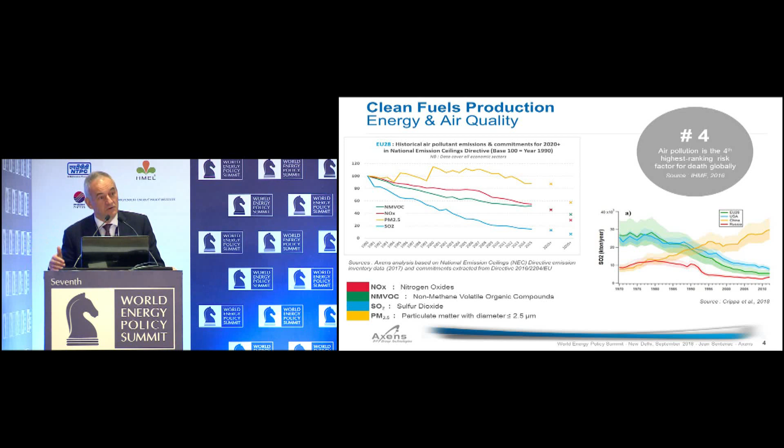Still, particulate matter, the yellow upper line, didn't progress that much. That is one of the reasons you have Dieselgate and now a kind of disaffection for the diesel engine in passenger cars, in favor of gasoline engines. But still a lot of progress has been done and remains to be done in Europe, and of course in other countries in the world.

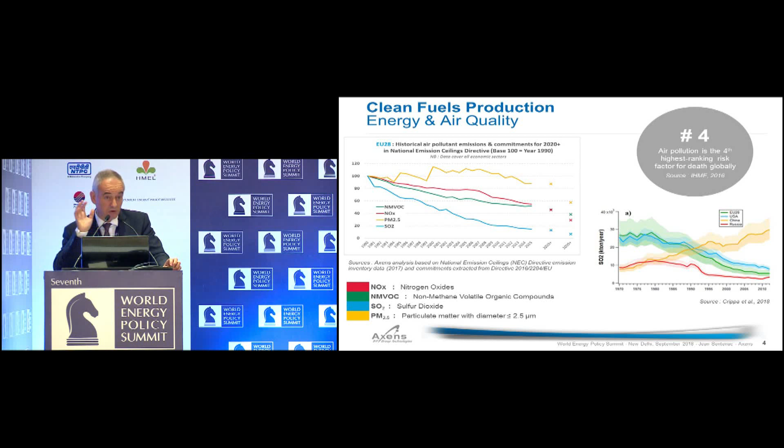Transportation is contributing to these emissions for its share: 13% of sulfur dioxide emissions coming from transport, 55% of NOx coming from transport. So there is a big challenge in addressing this issue in transportation. Our company is one of the leaders in producing what we call clean fuels, which are hydrocarbon fuels but completely desulfurized and taken out of pollutants.

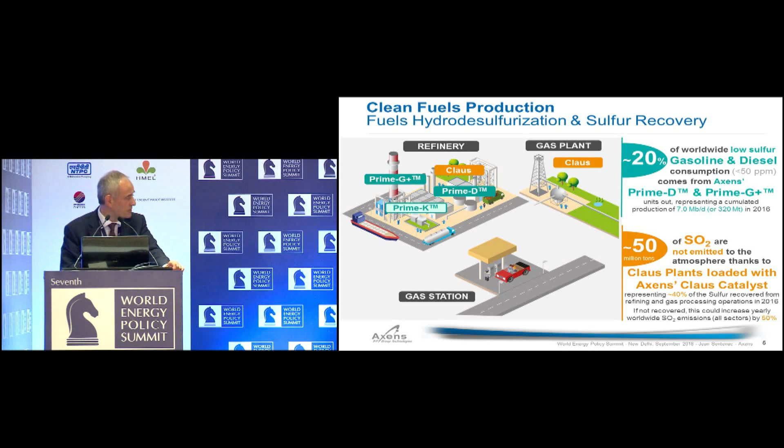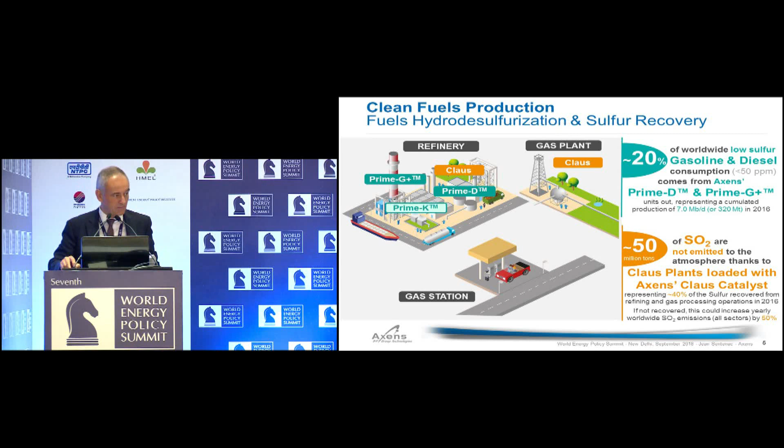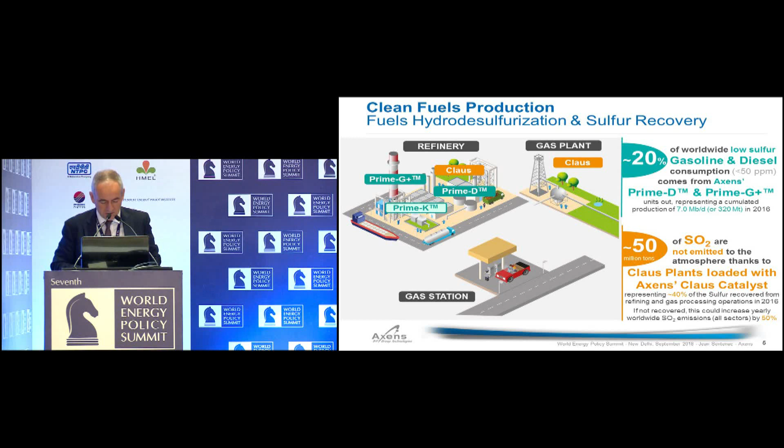Maybe I should speak in French sometime, it would be easier for me. But, precursors of pollutants, I think we say in English. Through our technologies developed with IFP, we've been desulfurizing 20% of the gasoline and diesel in the world, and 50% of the SO2 emissions generated throughout the industry use our catalyst to be transformed into solid sulfur. So we're heavily involved in the fight against pollution.

Our company is working a lot with the Indian refining industry to desulfurize gasoline and diesel. We have 14 projects underway that would start in the coming months or next year for gasoline, and 20 projects also for diesel in various Indian refineries. So we have great collaboration in this field to provide the country new types of hydrocarbons. I think I've almost finished my time, so I'll be rather quick.

On the next topic, biofuels - you see here the consumption of biofuels. We talk about second generation biofuels. It is expected to be multiplied by a factor of 25 in the next 5 years. Still, it will represent only lower than 1 million barrels per day. We consume 100 million barrels per day overall, so it's 1%. This means we still need fossil fuel, but still these fuels are a good way to decrease carbon emissions. It's also a good way to give jobs to farmers in the country.

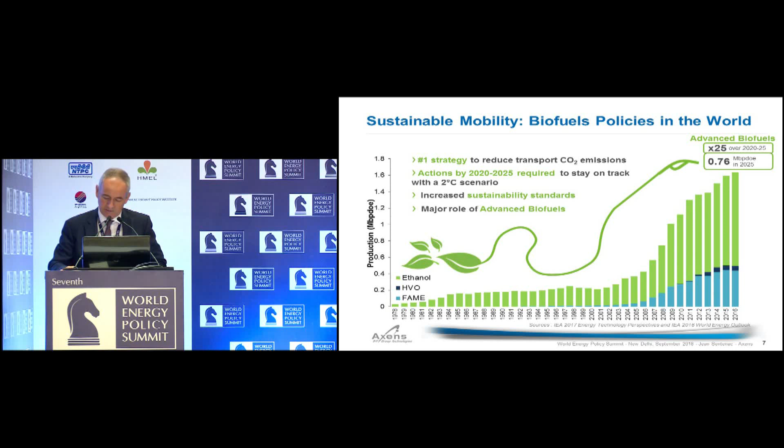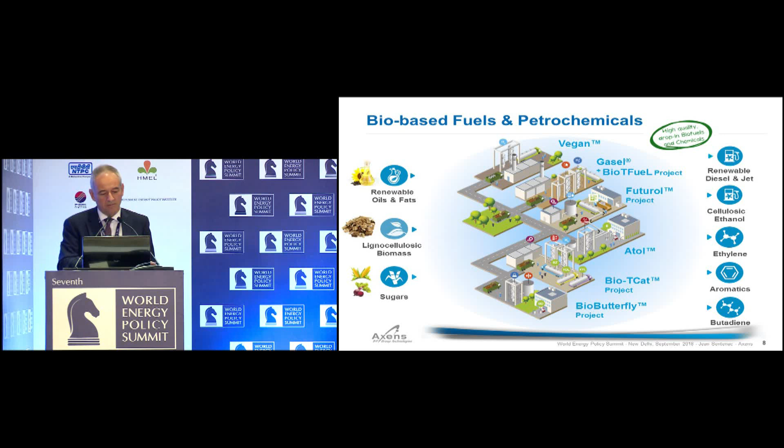Because of time, I'm going to switch that one. In most countries in the world there are mandates to incorporate biofuels in the pool. In India it is also the case. By 2017, the government set goals of E20, meaning 20% ethanol, and B5, 5% biodiesel by 2030 in the pool. So there will be a major effort in the country, and right now there are projects underway to produce up to 1 billion liters of ethanol in India. Almost each company has several projects.

Our company in France has also been heavily involved in the development of such technology. This is an example: France's oil market is no longer growing, France is a mature market, each family has 1 or 2 cars, so it's not similar to India. So some of the refineries are converted to biofuel. This is the example of the Total La Mède refinery, which will finish processing fossil fuel and be converted to biofuel by the end of the year.

So a lot of projects are underway. These are examples of ethanol projects we developed in France - this is the demonstration unit. You see, on this kind of pyramid, cellulosic material is later converted to gasoline, to ethanol. On the right is a different technology to produce biodiesel from such material.